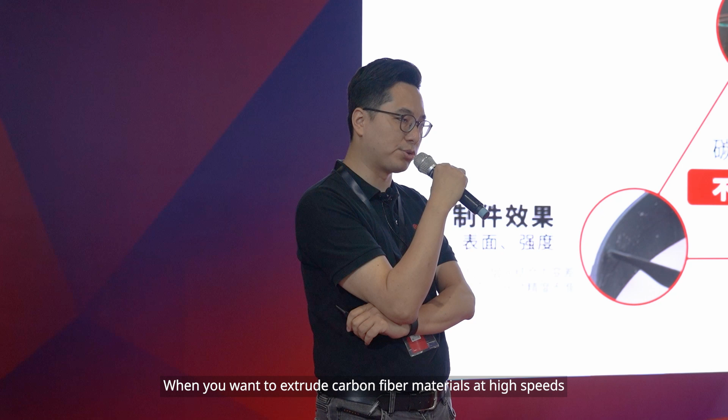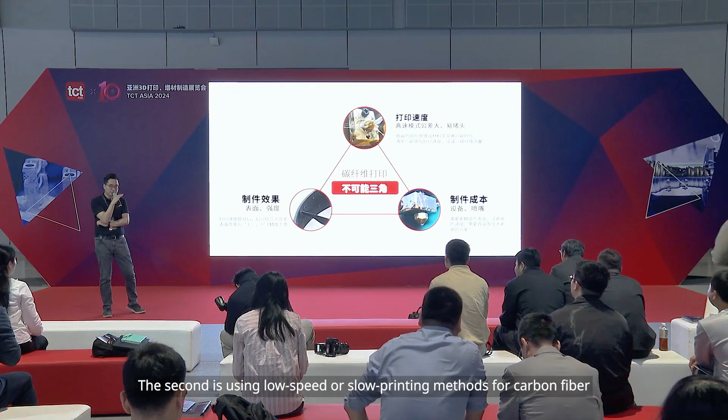When you want to extrude carbon fiber materials at high speeds, it is generally difficult to achieve. There are two solutions to this problem. The first is to reduce the carbon fiber content proportion, which can help solve the issue. The second is using low-speed or slow printing methods for carbon fiber.

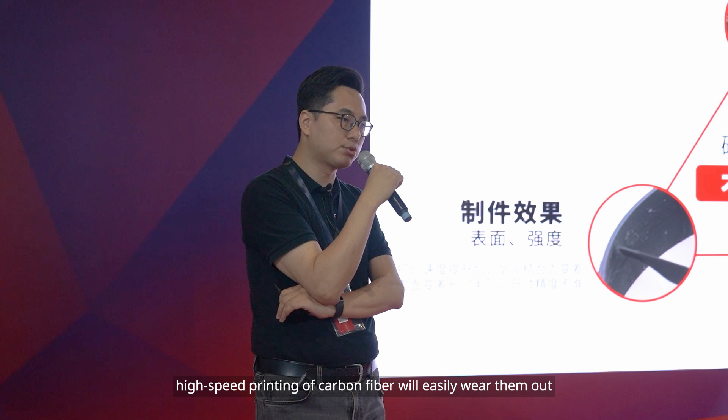Additionally, carbon fiber tends to wear out the nozzle. Whether you're using brass or hardened steel nozzles, high-speed printing of carbon fiber will easily wear them out, shortening their lifespan.

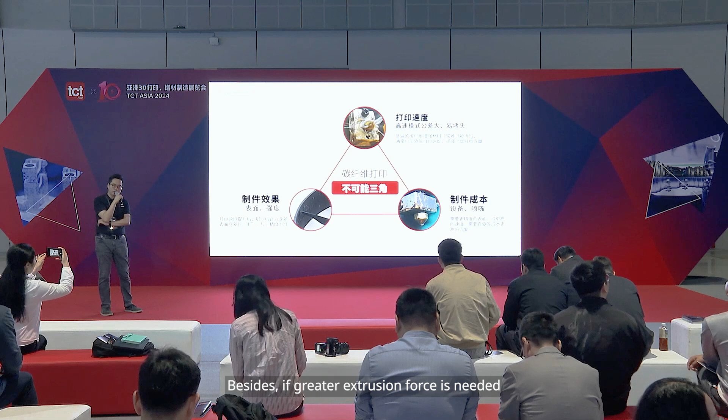Besides, if greater extrusion force is needed, a direct drive or servo motor is generally required, which increases the cost.

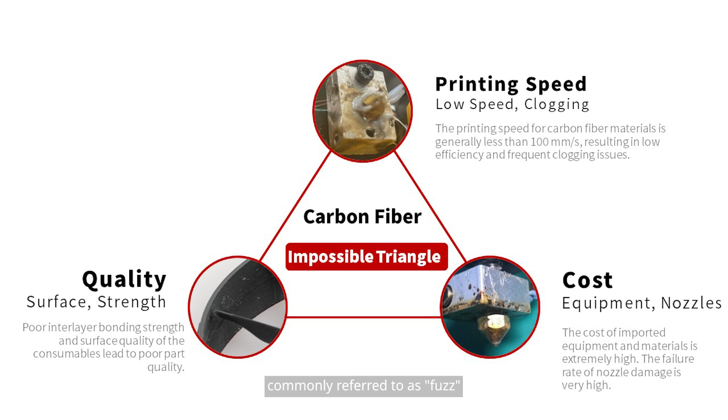Another point is the quality of the printed parts. When printing with short carbon fiber, the surface may show fuzz or filament-like projections, commonly referred to as fuzz. These are actually carbon fiber filaments floating on the surface.

Moreover, when printing with carbon fiber, it is generally observed that the precision is lower than that of traditional base materials. This represents a classic impossible triangle. Achieving one aspect means compromising on the other two.

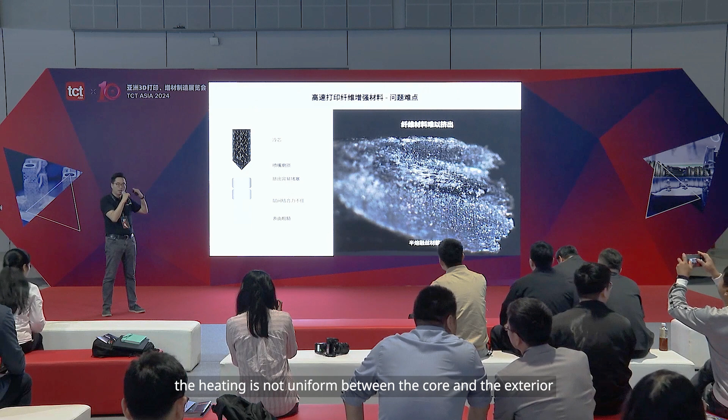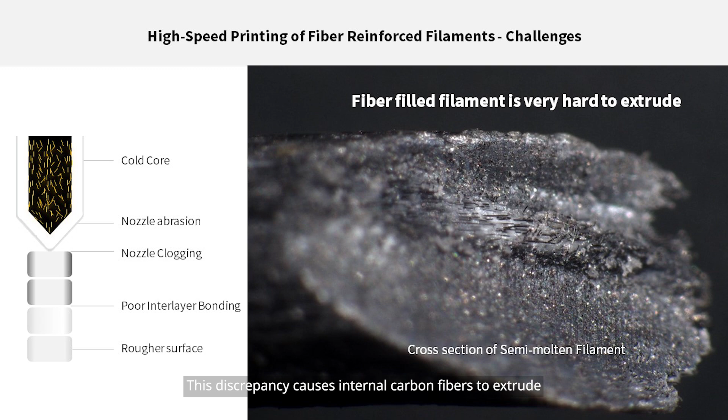This is the condition known as cold core during carbon fiber extrusion. When printing carbon fiber reinforced materials, the heating is not uniform between the core and the exterior. As a result, the core and outer carbon fibers are in different thermal states, with the core remaining at a lower temperature. This discrepancy causes internal carbon fibers to extrude at lower temperatures, leading to nozzle damage. Most carbon fiber clogs are due to this issue.

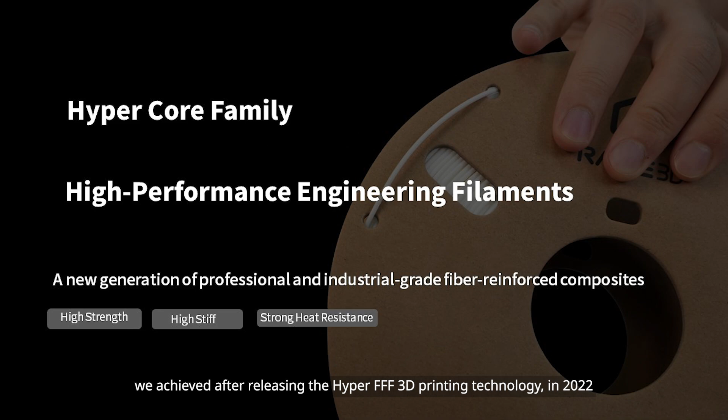HyperCore is a major breakthrough we achieved after releasing the HyperFFF 3D printing technology in 2022. I personally believe that HyperCore will be a future trend for the entire FFF printing technology.

Yes, we call it HyperCore, or as some friends refer to it, core shell filament. The core of the filament is enriched with carbon fiber reinforcement, while the outer part is made of traditional materials like ABS, nylon, or other engineering materials.

With this core shell processing technique, the material becomes suitable for high-speed printing equipment, exhibits excellent surface quality, optimizes thermal conductivity, and avoids cold core issues.

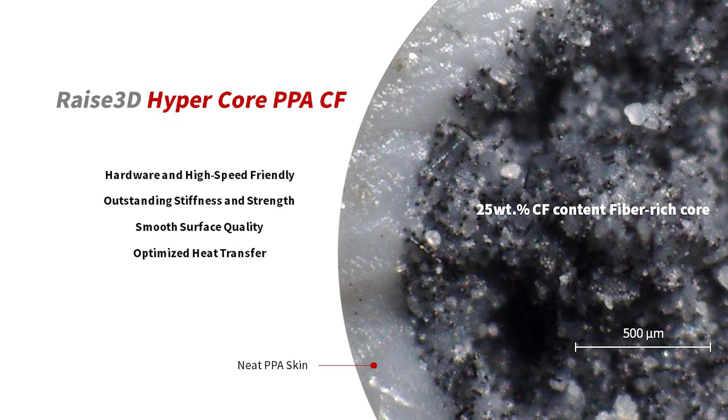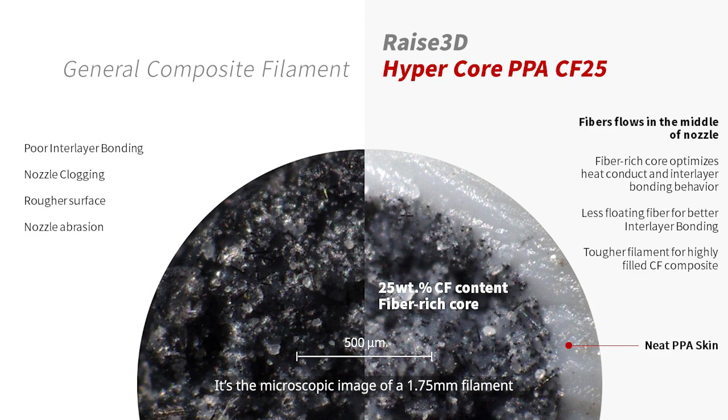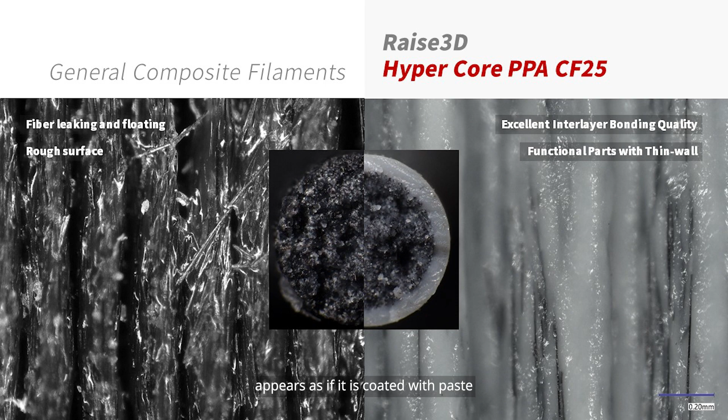This is the difference between HyperCore material and traditional short carbon fibers under an electron microscope. It's the microscopic image of a 1.75 mm filament under the electron microscope. On the right, we can see that each fiber during printing appears as if it is coated with paste. Therefore, during extrusion, it is no longer the traditional filament mixed with carbon fibers.

So, how is its strength? As you can see, the biggest challenge when printing with short carbon fibers is in the Z-axis. The Z-axis stiffness and strength have greatly improved compared to the original.

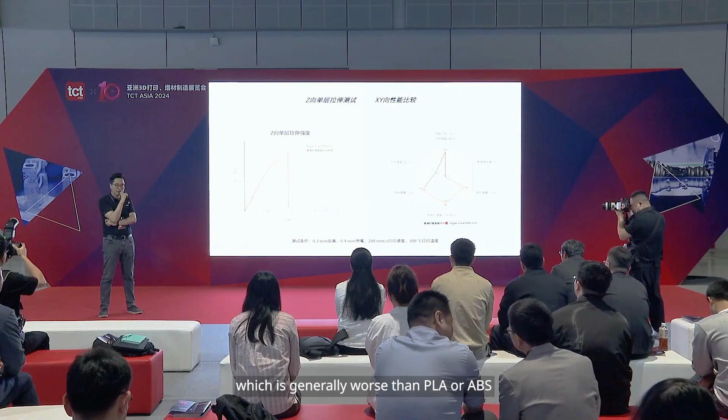For carbon fiber, the challenge lies in the interlayer bonding strength, which is generally worse than PLA or ABS. However, with the HyperCore composite filament, we can solve this issue because the interlayer bonding strength is provided by the base material, ensuring a very strong adhesion.

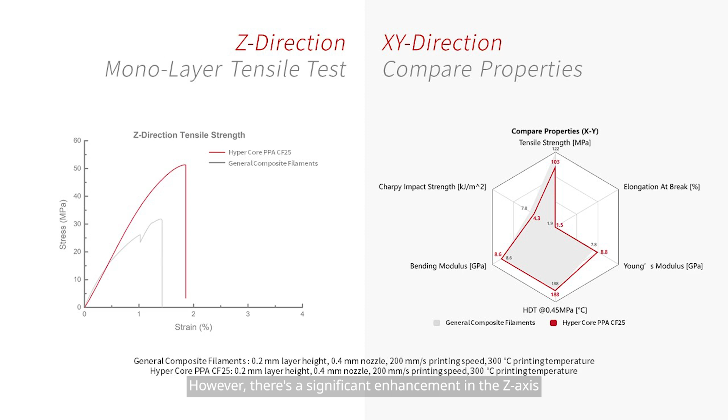In the XY axis direction there isn't much variation compared to traditional nylon reinforced carbon fiber. However, there's a significant enhancement in the Z-axis.

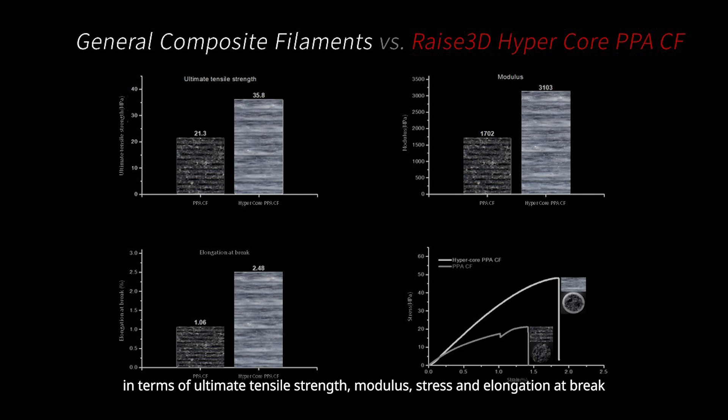This is a comparison between HyperCore PPA CF filaments and standard carbon fiber materials in terms of ultimate tensile strength, modulus, stress, and elongation at break. This is a comparison with standard composite materials.

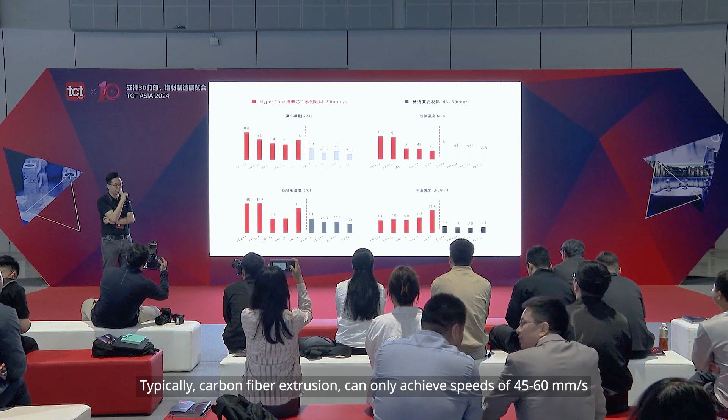In terms of printing speed, currently, our HyperCore filament prints at speeds over 200 mm per second. Typically, carbon fiber extrusion can only achieve speeds of 45 to 60 mm per second. Therefore, HyperCore's printing speed is approximately 3 to 4 times faster than that of traditional composite materials.

The quality, impact strength, and heat distortion temperature of HyperCore material have also seen significant improvements compared to traditional materials, particularly in terms of HDT.

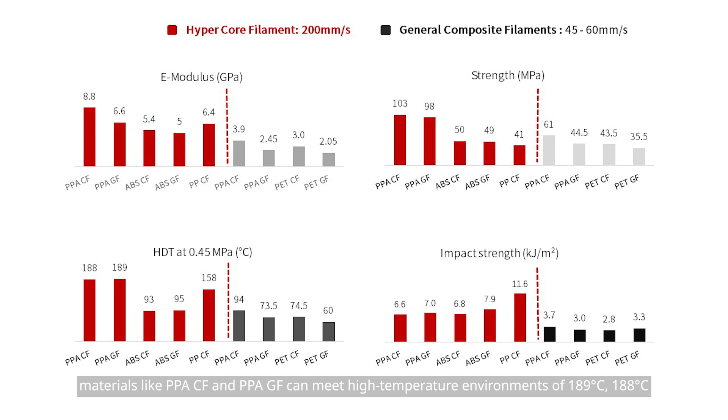I know that, in many high-temperature work scenarios, there is often a need for PEEK. In fact, our current observations show that materials like PPACF and PPAGF can meet high-temperature environments of 189 degrees Celsius, 188 degrees Celsius, thus being able to partially replace the need for PEEK.

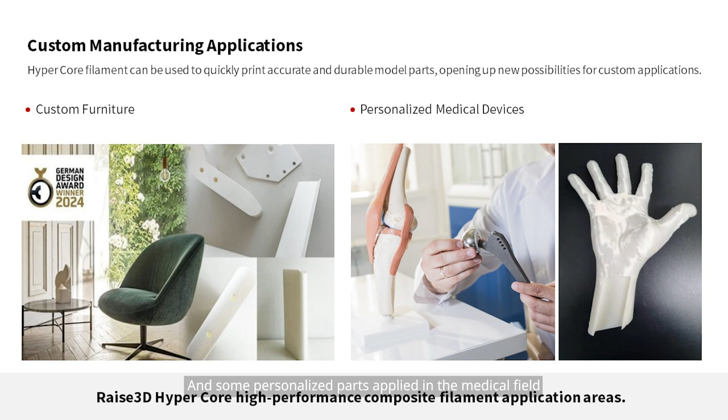This is what we mentioned earlier, regarding the strength of the Z-axis at a printing speed of 300 mm per second. In terms of the applications for HyperCore material, we can produce various parts, such as components, interior parts, end-use parts, and some tooling parts, and some personalized parts, applied in the medical field.

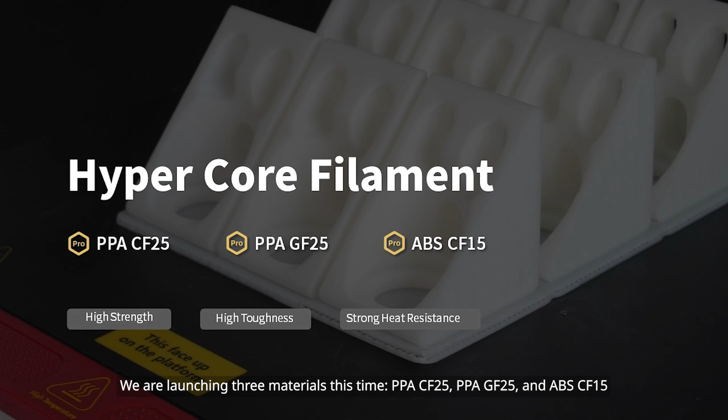We are launching 3 materials this time, PPACF25, PPAGF25, and ABS-CF15. One notable feature is that our carbon fiber content can reach up to 25%, which is difficult to achieve for short carbon fibers.

Using core shell processing, we concentrate the fibers in the center of the filament. I believe that our HyperCore material has achieved a strength level between that of short staple fibers to continuous fibers.

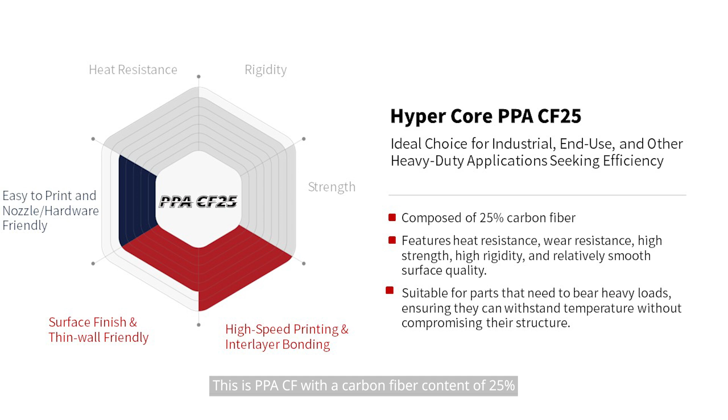This is PPACF with a carbon fiber content of 25%. PPAGF25 contains 25% glass fiber, which offers a better cost-performance ratio. As many of you may know, glass fiber is generally more economical than carbon fiber.

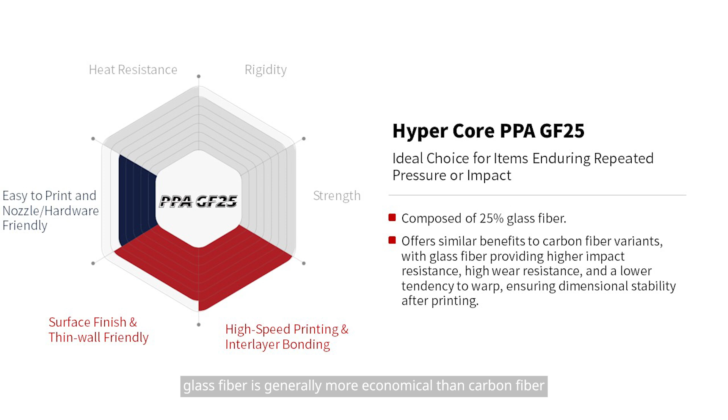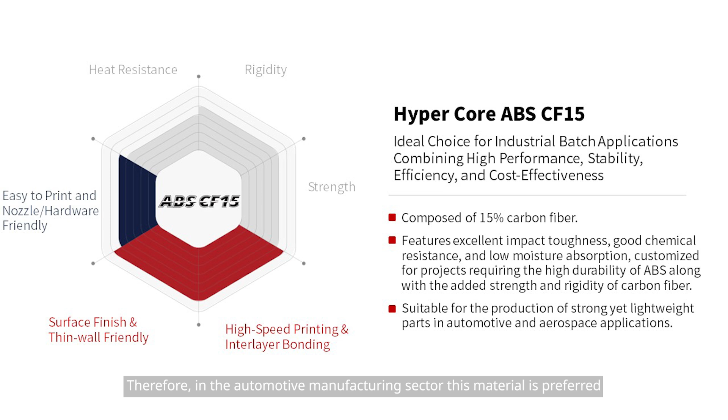This is ABS-CF15, which is the most commonly used and widely applicable. ABS, as a base material, has a broader range of applications. Therefore, in the automotive manufacturing sector, this material is preferred.

The following is an introduction to our brand new 3D printing equipment. This is our newly released equipment, capable of continuous production of high-performance engineering filament.

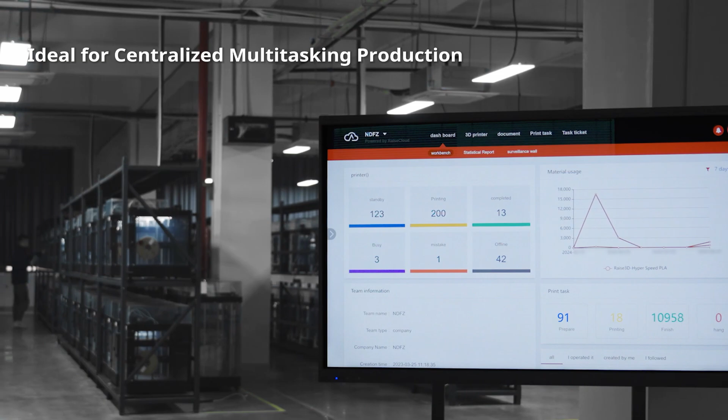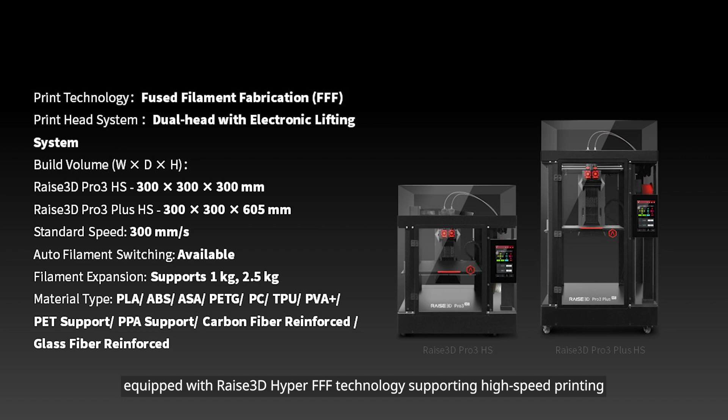So, for this latest model, the first thing is, it can achieve high-speed printing of composite materials. This is the biggest feature of the Pro3 HS series. The printing speed can reach up to 300 mm per second, equipped with Raise3D Hyper FFF technology, supporting high-speed printing.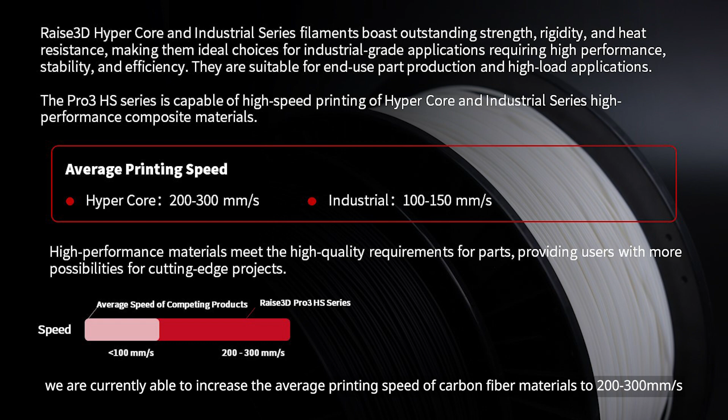Additionally, the Pro3 HS features auto-filament switching functionality, as you can see, with the Hyper Core material. We are currently able to increase the average printing speed of carbon fiber materials to 200 to 300 millimeters per second. Compared to the previous generation Pro 3 series, the Pro 3 HS can save printing time by 30% to 70%, depending on the size of the model.

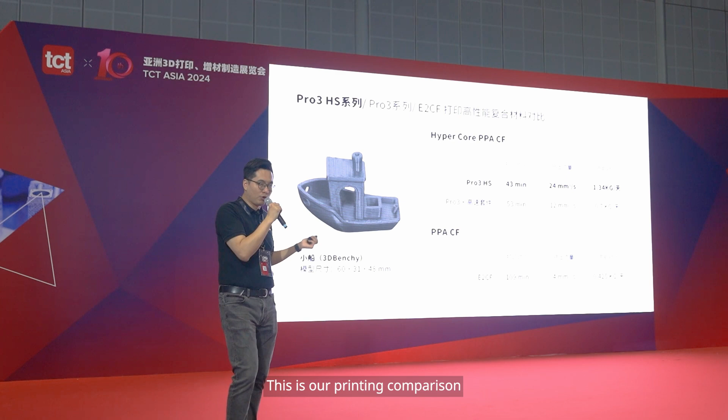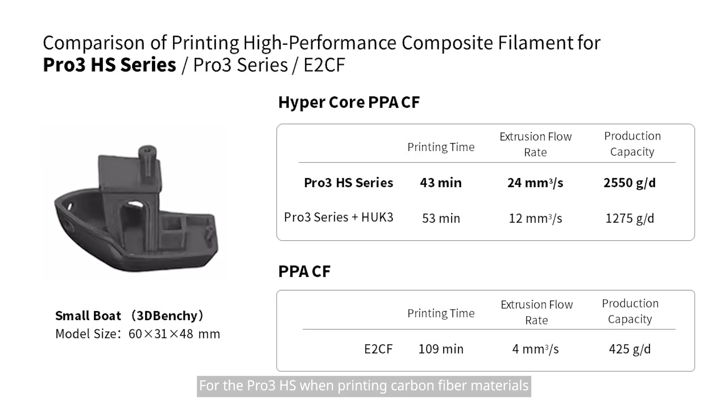This is our printing comparison. If you're running a printing farm or providing printing services, you should be quite sensitive to this data. For the Pro 3 HS, when printing carbon fiber materials, based on our internal tests, it can handle about 1.3 kilograms per day. So, it's a production-grade device.

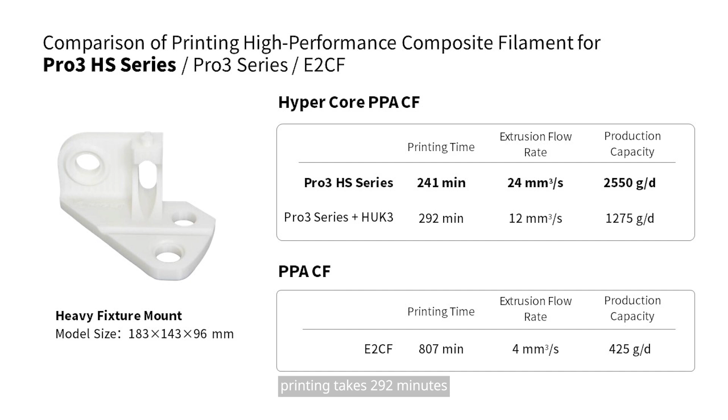This is the printing data for a standard fixture. With the Pro 3 equipped with a hyper-speed upgrade kit, printing takes 292 minutes. However, for the Pro 3 HS series, the printing time is further reduced, compared to the original Pro 3 with a hyper-speed kit.

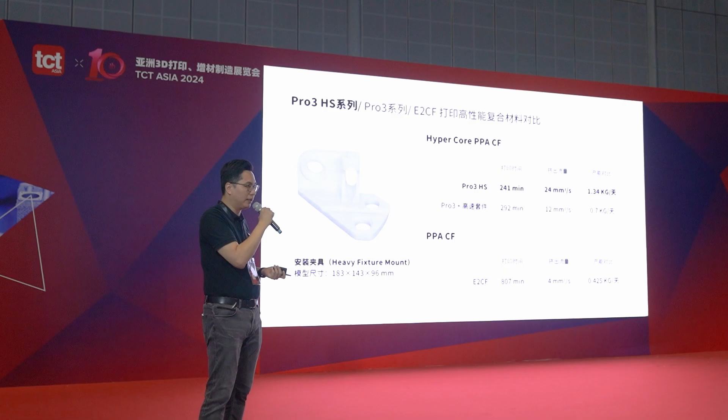Closed-loop stepper motors. No need to delve into details, it's quite clear to everyone. They provide better precision control. This is an aspect that interests many people.

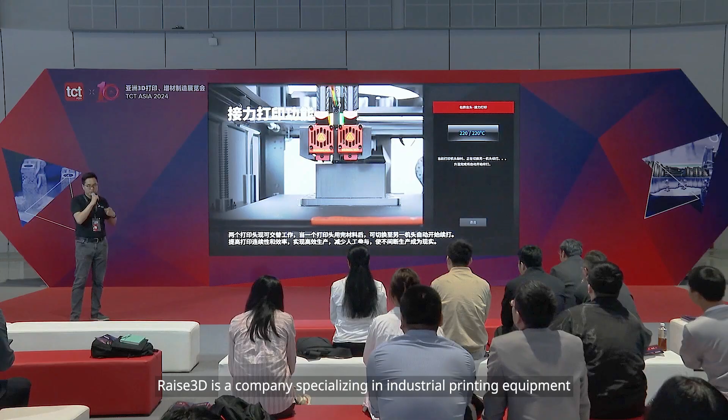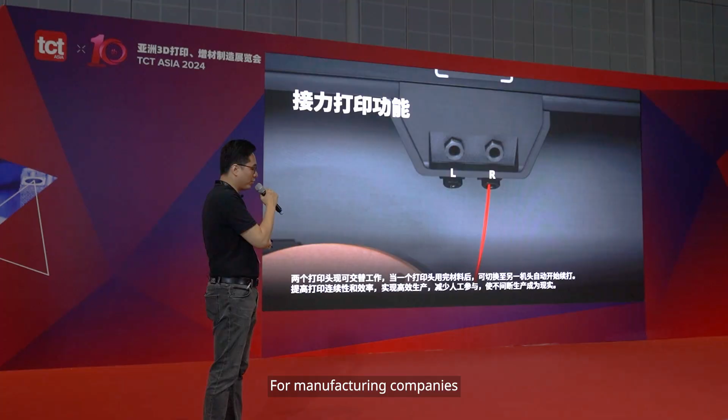Now, as you can see, many FFF companies are working on continuous filament feeding. Raise3D is a company specializing in industrial printing equipment, serving clients who are primarily enterprises and manufacturing companies. For manufacturing companies, the main challenge lies in whether they can provide continuous, uninterrupted filament feeding for long periods of time. Perhaps when I'm printing a large model, what if I run out of filament with only a little left? Can I seamlessly continue printing?

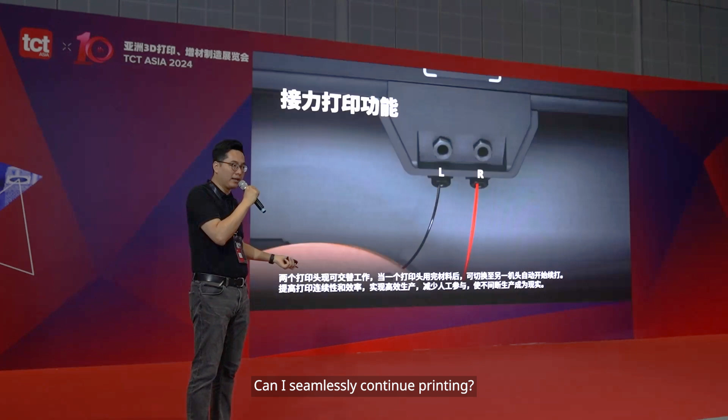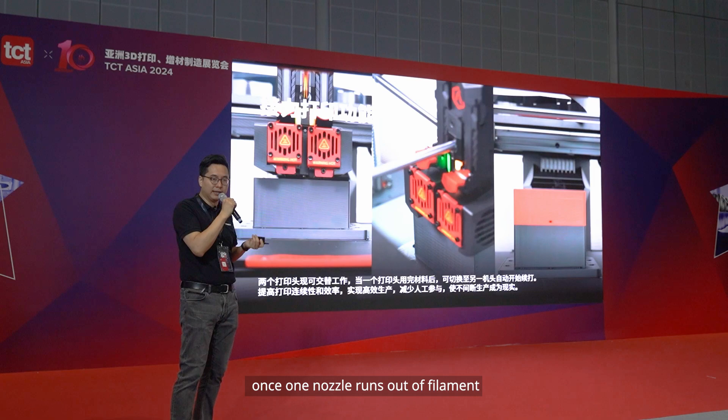That's the challenge. Our solution is based on our existing system, offering an auto filament switching feature, leveraging the advantage of our dual extruder printer. Once one nozzle runs out of filament, we seamlessly switch to the other nozzle to continue printing. This is an unparalleled advantage of having dual nozzles.

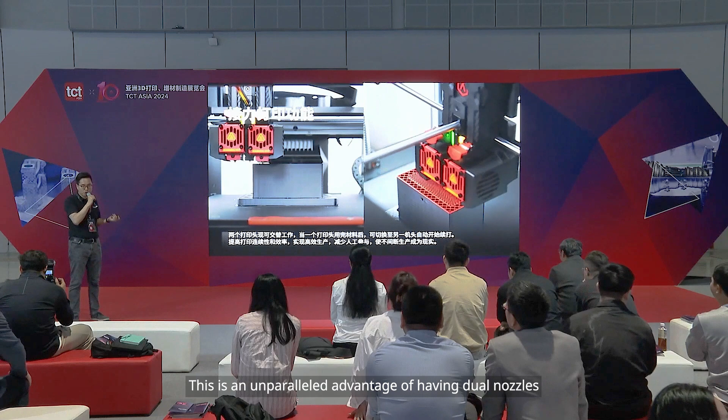Additionally, the Pro 3 HS is equipped with a 2.5 kilograms external filament box, allowing for 5 kilograms of continuous filament feeding in a single run. It can achieve up to 120 hours of continuous printing.

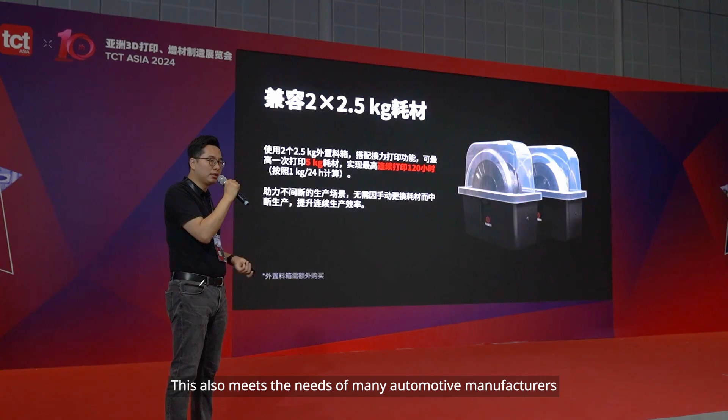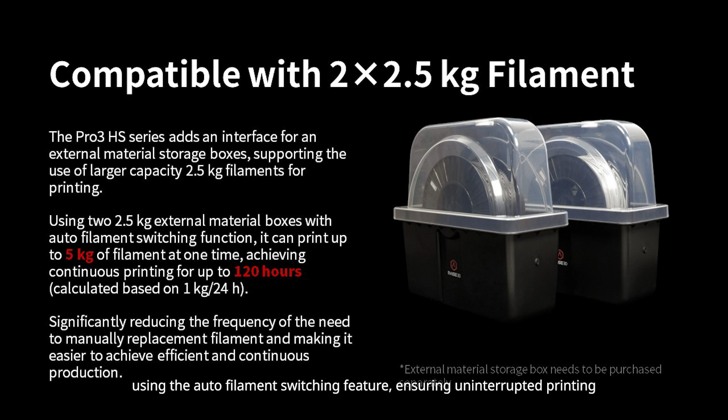This also meets the needs of many automotive manufacturers. For example, if they need to print a large steering wheel prototype, a single spool of filament might not be enough. What happens if the print runs overnight? In such cases, they can continue printing using the auto filament switching feature, ensuring uninterrupted printing.

The RFID filament sensor can identify the filament, preventing the use of incorrect materials. In fact, it serves as a foolproof feature for us.

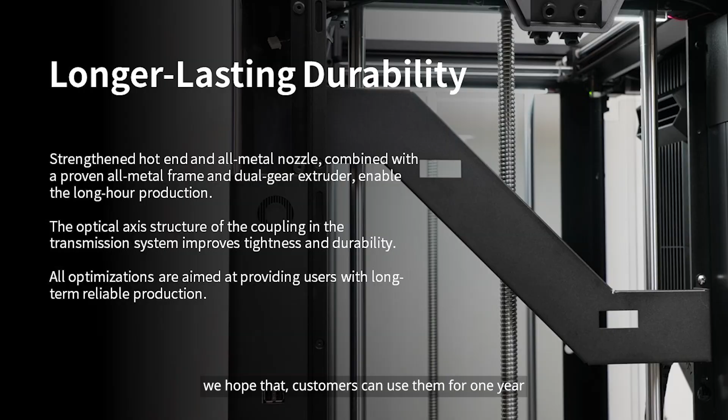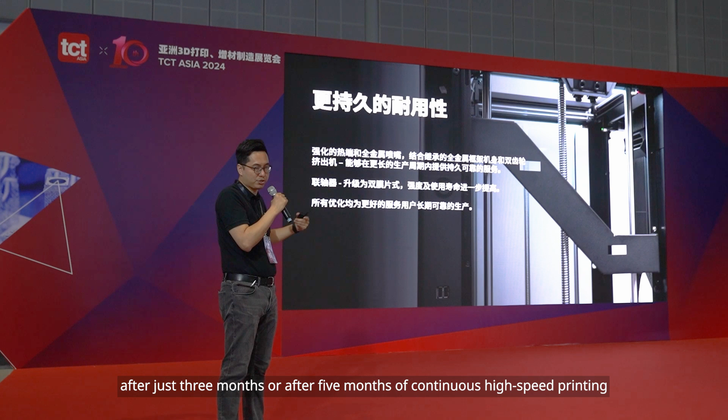Greater durability is something we emphasize a lot. For our products, we hope that customers can use them for 1 year, 2 years, 3 years, 5 years, or longer. We don't want customers to replace the equipment after just 3 months or after 5 months of continuous high-speed printing. We aim to provide customers with a long-term, effective solution.

Additionally, the Pro 3 HS is very user-friendly. The Eve Smart Assistant helps resolve common printing issues. Furthermore, it features power loss recovery and automatic detection functionalities.

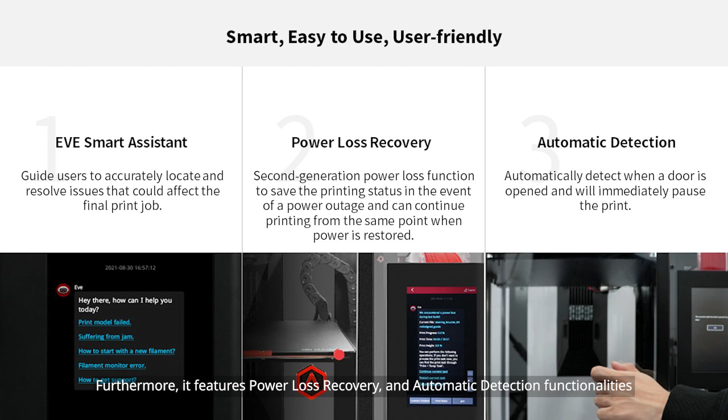Next is the Airflow Manager, and I want to highlight this feature specifically. The Airflow Manager function differs from the traditional HEPA purification method that many people might understand it to be. People may mistakenly assume they serve the same purpose, but they don't. The Airflow Manager operates with internal circulation, circulating and heating the printing chamber internally.

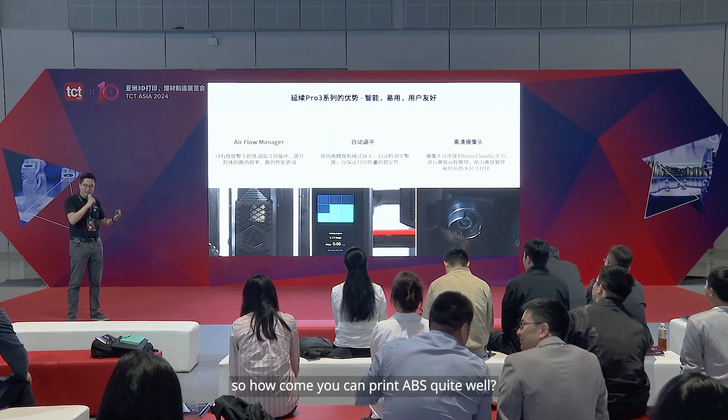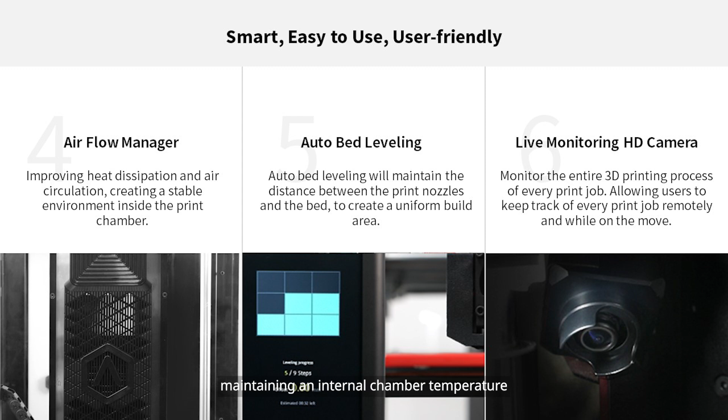So, many might wonder, you don't have a heated chamber, so how come you can print ABS quite well? Why does it sometimes perform better than solutions with a heated chamber? The reason lies in the Airflow Manager. It circulates warm air at the bottom of the printing chamber, maintaining an internal chamber temperature of around 45 to 50 degrees Celsius.

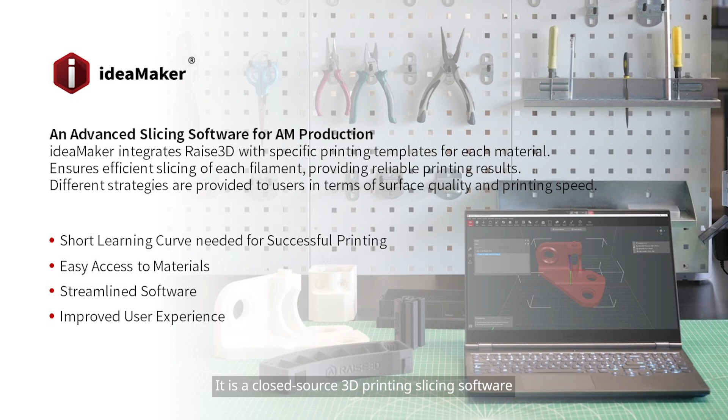Here is our self-developed slicing software, IdeaMaker. It is a closed-source 3D printing slicing software. For enterprise customers, this offers greater security.

Additionally, in our latest version, we have included support for the DF2 DLP resin printer. This means that, with a single slicing software, you can perform slicing for both light curing and FFF printing.

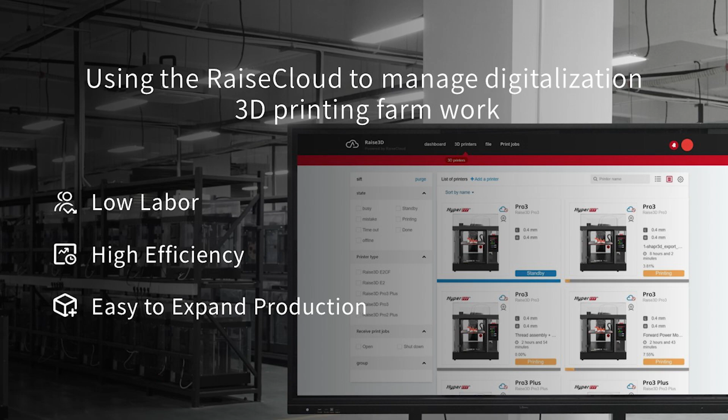We have an intelligent factory management assistant called Raise Cloud. This is a crucial feature for many users. Whether you're a farm operator or a service provider for a printing factory, the ability to manage multiple devices is essential.

So our online management system's logic differs significantly from that of consumer-grade systems. Here's a joke: these devices on the farm are tied to the enterprise, not to individuals. So if an employee leaves, they'll be kicked out of the management group. Unlike consumer-grade devices, which are personal, this is a completely different approach. It's a whole different ballgame.

So when using consumer-grade devices, everyone faces a common challenge. For example, if I want to use a printer remotely today, I have to ask my teacher, classmate, or friend to send me the login password before I can use the device.

With Raise Cloud, that's not necessary. Whether it's your print job or mine, everything is visible in the system. If you print a Pikachu, your boss will immediately come find you.